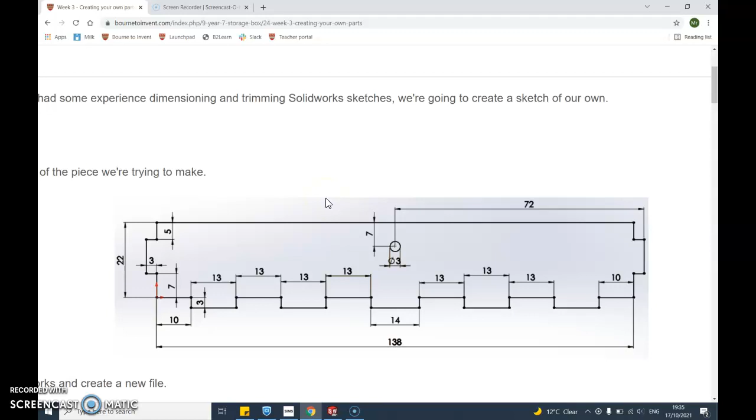Okay, so first of all, I'm on to week 3. These are my instructions, and this tells me the part I've got to look at. So I need to think about it.

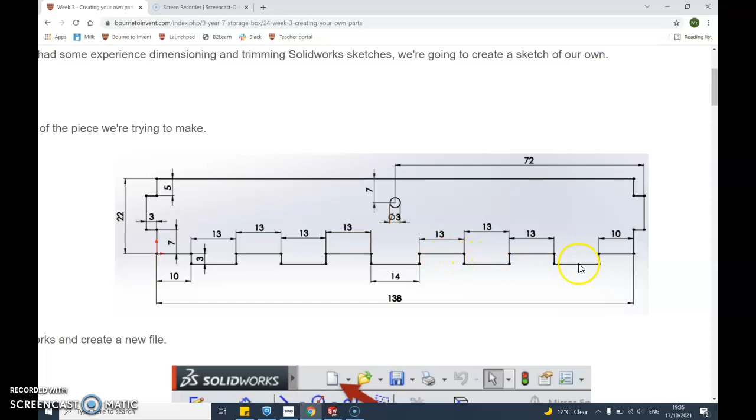It's going to be made of lots of rectangles. First of all, the first rectangle is going to be 22 by 138, that's the overall. Then I've got a little rectangle on the side here, and one on the side here, 1, 2, 3, 4, 5. So we're going to make 5, 6, 7, 8 rectangles and a circle. That's what's going to make up the silver part.

So over to SolidWorks, let's start a new part.

Now I should probably draw this thinking about where it'd be on the box, it should be on the front plane. So I'm going to go up to Sketch, then Sketch again, click on the front plane, and we'll start drawing a rectangle.

So I'm up in this corner. All the stuff that we need is always in this top left hand corner. Make sure when I first start drawing, I start drawing from the origin, that's that little orange dot. We'll go over there and start drawing.

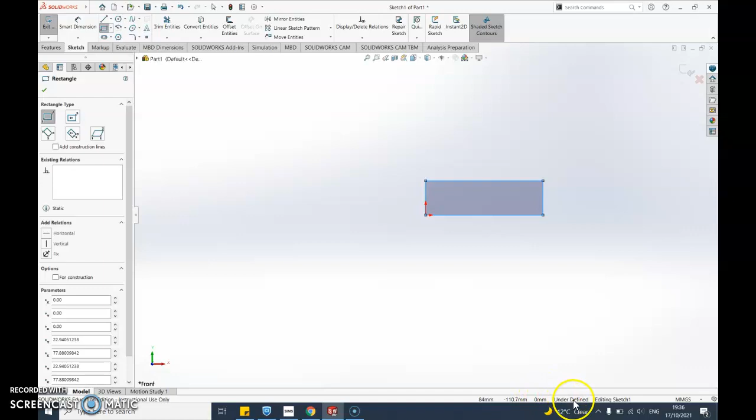You'll see down here straight away it says underdefined. The next thing I need to do is make that defined. So how am I going to do that? Go to Smart Dimension, grab the top, and this is going to be 138 across the way, so 138 by 22 that way. Now you'll see, there we go, I've gone back to fully defined.

So now what do I need to do next? Next thing I need to draw is the side bits on. Let's have a quick look. So I've drawn this 22 by 138, this is this bit over here. That's going to be 7 away, so I need to draw a rectangle which is 3 by 10. It's not shown on this diagram, but it's 3 by 10 and then 7 away, or 5 from the top, it doesn't matter, I only need to do it on one of them.

Right, so let's zoom in, using the mouse wheel. I'm pointing at the bit I want to zoom in and just pulling the mouse wheel towards me. Let's draw another rectangle. Key with this bit is to make sure I'm drawing on the line. Again, when I draw things, it doesn't really matter what the shape is, because I'm going to use the smart dimensions to put it into the right shape.

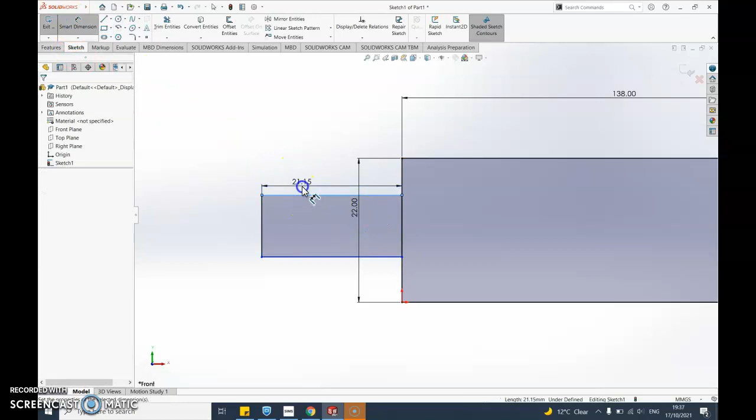One thing to watch out for is make sure you don't draw on the middle dots. If you draw on that middle dot, it will lock into it. If you do that, you just need to undo and redraw again. So smart dimensions: I'm going to do 3 across there, and this is going to be 10. Just click on the line, drag it away, and say 10.

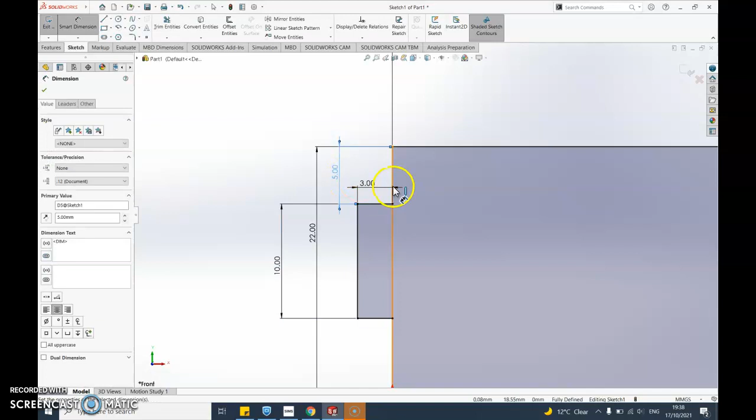And now I need to say 5 away from the top. This is the fiddly bit, so what I need to do is click the top line of my shape and the top line of the little rectangle, and tell it to be 5 away. You should see down here it says fully defined, so that's happy again.

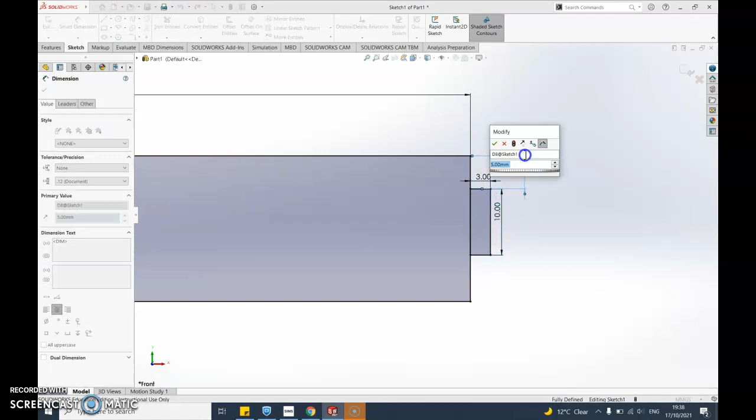Let's do the same on the other side. Just zooming out and zooming back in again, using that mouse wheel, pulling it towards me, I get the rectangle, start drawing on the line. It doesn't matter what the shape is, because I'm going to go 3 by 10, and then again click that top line and tell it to be 5 away. So there we go, back to being fully defined.

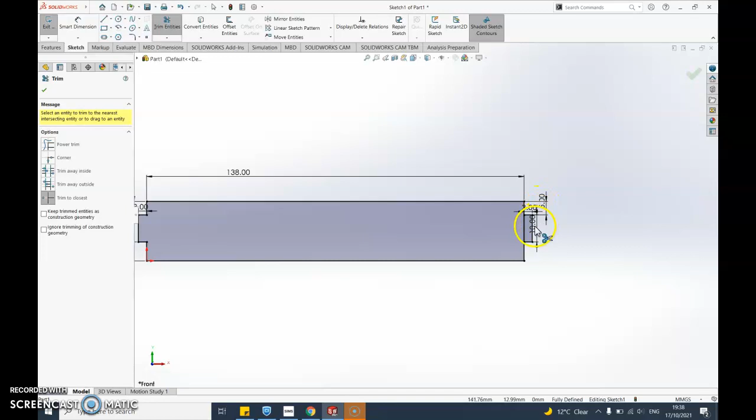That is happy. So while I'm here, I'm just going to trim off these extra lines. So trim entity, always make sure it says trim to closest, which is the bottom option. Zoom in, you probably have to click it twice, and zoom back over the other way, click twice, and there we go.

So what's next on our drawing? Let's go back to the original drawing. So I've just done the 22 by 138, I've done this little bit here, and this little bit here. So now I need to do 1, 2, 3, 4, 5 rectangles going along the bottom. They're going to be 10 in from the side.

All the gaps and things will be 13, except the middle one is going to be 14. I'm going to start at one end and work my way across. So back to my rectangle tool, I'm going to draw a rectangle in. Remember, it doesn't matter how I draw it. Okay, so this is going to be 13

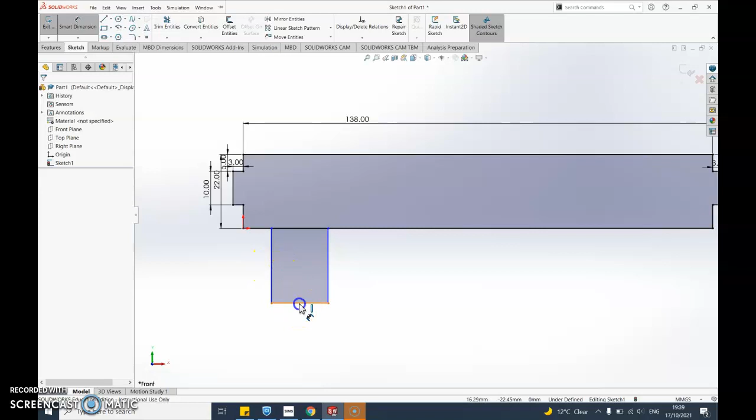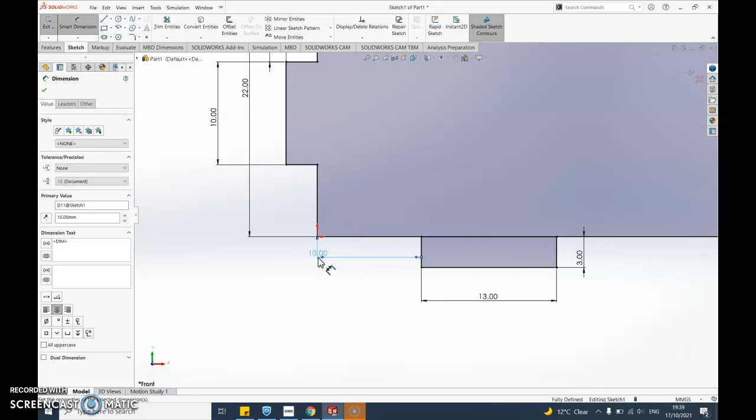by 3. And again, this is a little fiddly bit coming up, so watch carefully. I'm going to click on this vertical line, a little short one, and I'm going to click on this vertical line here, because they need to be 10. Or start from one side, and then I can just move it across. Okay, so there's my first finger joint done, and now I just need to repeat that.

So again, I'm going to grab a rectangle, drawing on the line. I might actually just draw a few in while I'm here. Okay, how many we got? 1, 2, 3, 4, 5. One other one there. Okay.

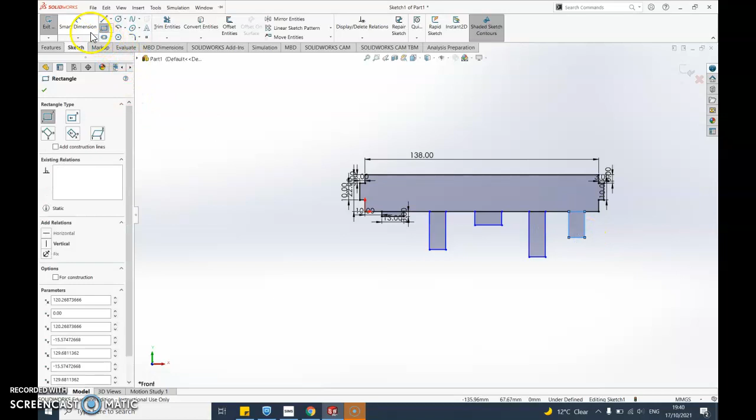Smart dimensions, let's go in here. So gap from there to there is going to be 13. This is going to be 3. And that's going to be 13. Let's do the gap from here to here.

So vertical line to vertical line, that's going to be 13. This will be 3. And this will be 13. And okay, so actually no, that's the middle one, so that actually is going to be 14. So I'm just going to tweak that.

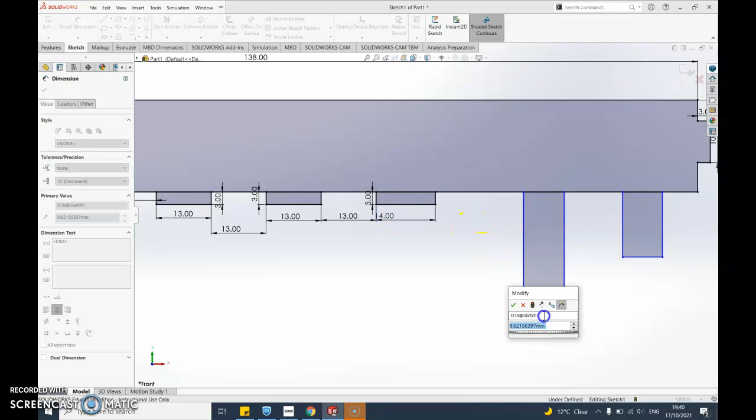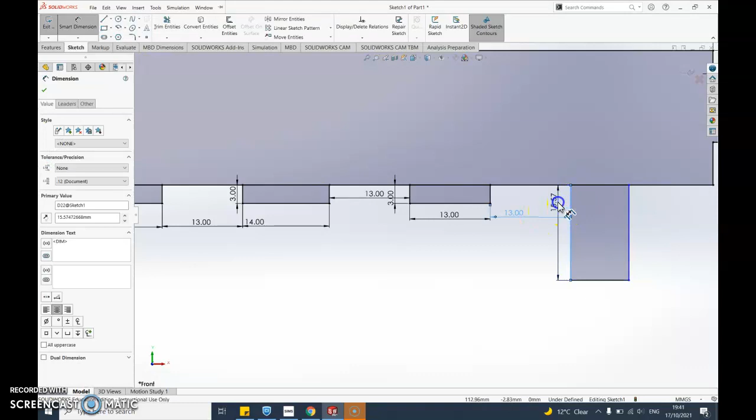Okay, this should be 13. 3. And vertical line to vertical line, and let's say that's 13, so that should pull that across. And 13 again, so let's do that one. And that'll be 3. And this will be 13.

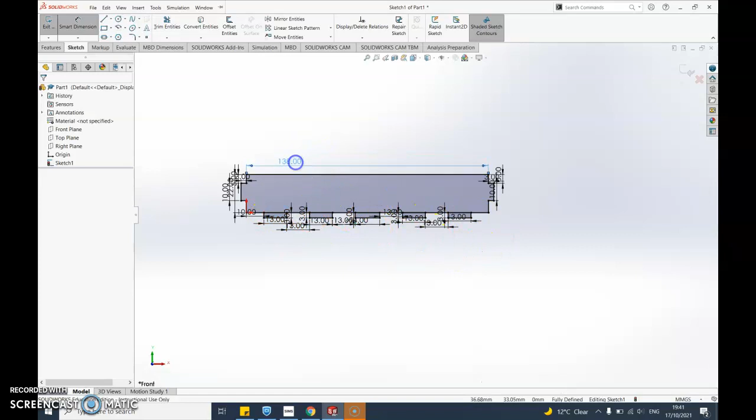Now the last one I shouldn't need to do, but I will just do it just to show you. So from this vertical line to that vertical line should be 10. And when I do it, it should come up with a warning. Great, if it comes up with that warning, that's fine, I want that, just go cancel. Because obviously, if I add up all those 13s, the 10s, the 14, that will come up to 138. So it doesn't need to know that last one, because obviously that would add up to 138.

Okay, what's next? Let's do a little bit more trimming. So back to trim entities, and I'm just going to get rid of these bits here. So again, always double click on them twice. Use that mouse wheel, zoom it in, zoom it out so you can see what you're doing.

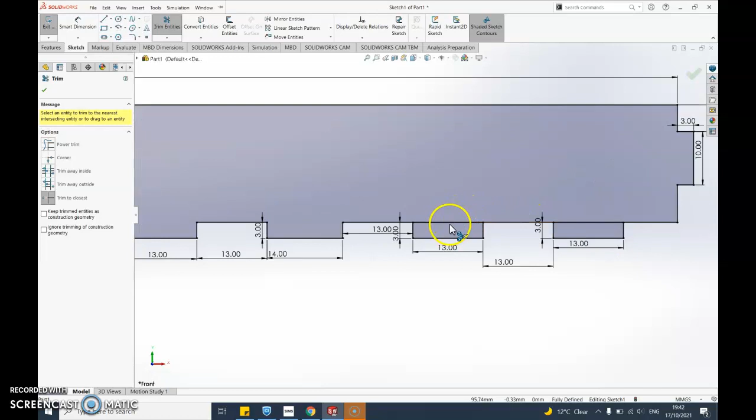Okay, so what's next? The last little bit here is going to be doing the circle. Let's have a little look at the instructions. So what does it say? I need a 3mm diameter circle that's going to be 7 away from the top and 72 away from the side. Okay, right, let's go about doing that.

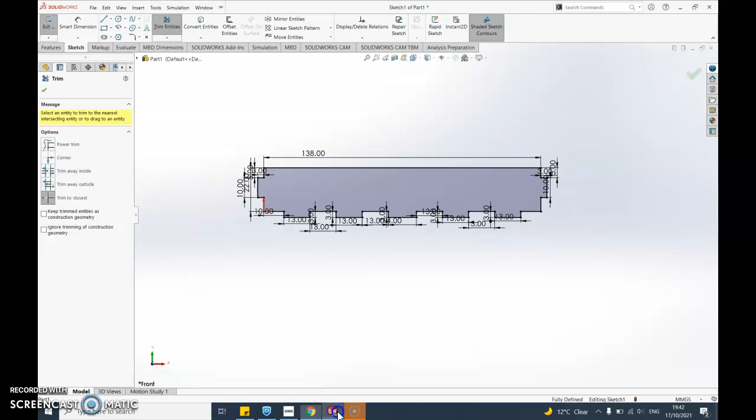So this time, up in this corner here, in the drawing tools, I need the circle. I'm going to zoom in a little bit, and I'm just going to draw it about there. Okay, now one thing I need to be careful is make sure whenever you draw it, doesn't matter what size it is, just don't go over the line. Okay, otherwise that'll make things a bit tricky.

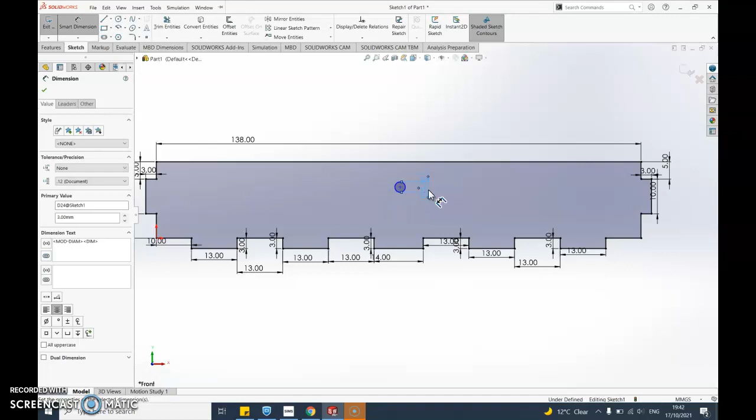Grab the Smart Dimension, now let's have a look at this. I need to grab the side there, and that's going to be 3. Okay, so it's 3mm from there. Let's grab, now this is a little bit fiddly, I need to grab that middle circle, there you go, this little dot, and click on the dot at the top. Okay, and that's going to be 7.

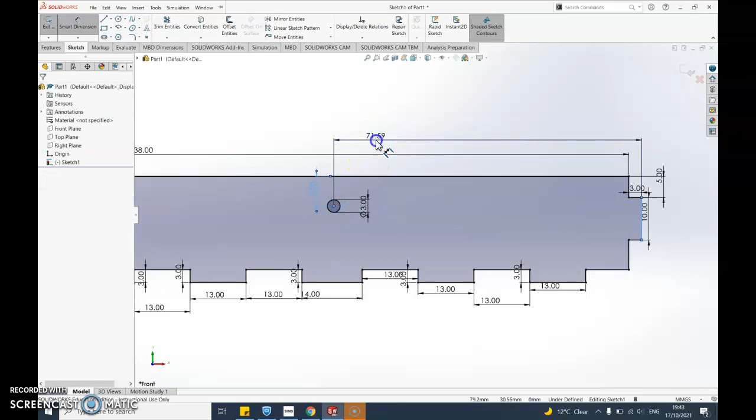Okay, and then we're going to do from the side. So from this line here, that middle dot, pull away, and that's going to be 72. Okay, right, there we go. We have now finished doing that sketch drawing.

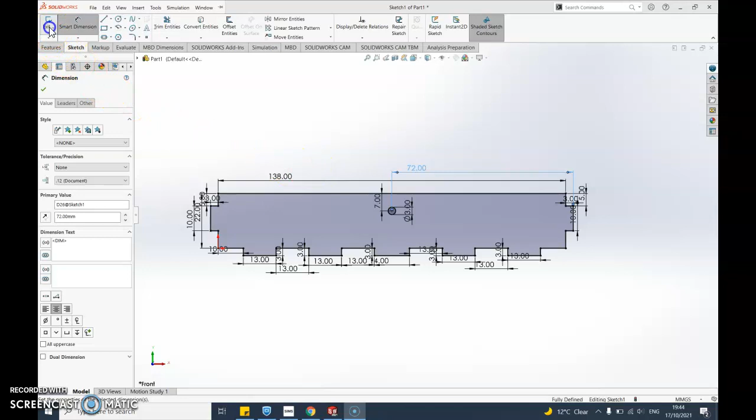I now need to do the extruding. So I'm going to go... last little bit I need to do is just to extrude this and put an appearance on. So I go exit sketch. This is always a good way of looking, just checking to make sure there's no overlapping lines or if anything looks weird and wonderful. With that still clicked on sketch 1, I go features, extruded boss base, and it's just

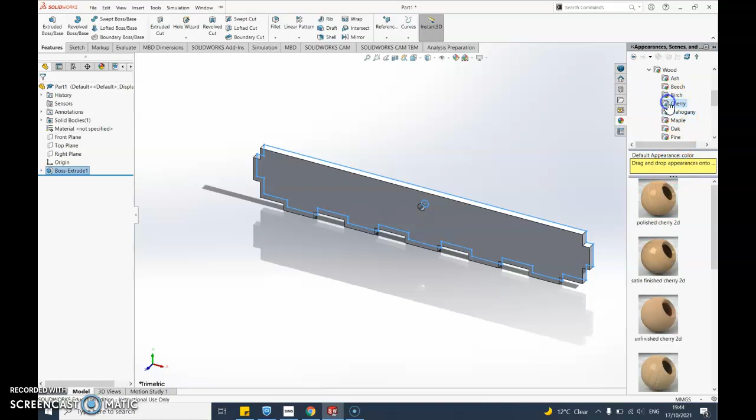3, enter. Okay, let's pop an appearance on there to the beach ball. Just going to expand that a little bit. There we go, so it's under appearances. I'll just select this little arrow there. Find organic, click there, and I want wood. And let's go for something a little bit lighter. That's quite nice. And just double click on there, and that should apply it to your piece.

Okay, when you've done that, screenshot that, and then that's the silver done. Okay, well done.